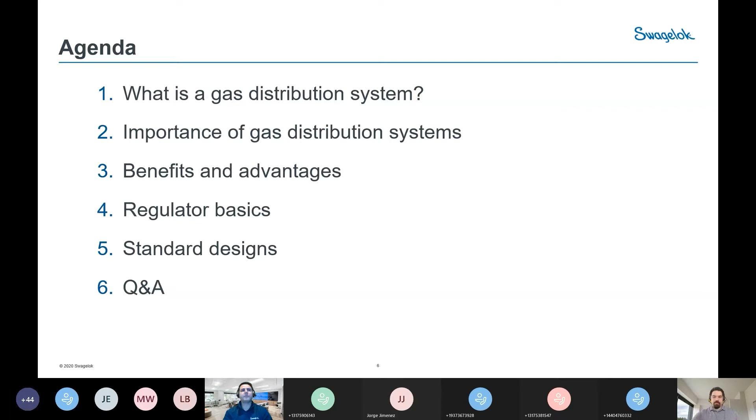All right, so let's start by looking at what gas distribution systems are. Gas distribution systems play crucial roles or functions for many industries. These systems work to deliver gases from a high pressure source to the facility at a pressure rate required by each of these applications. So the systems are designed to provide precise and safe delivery of high pressure, toxic, corrosive, or flammable gases in some cases.

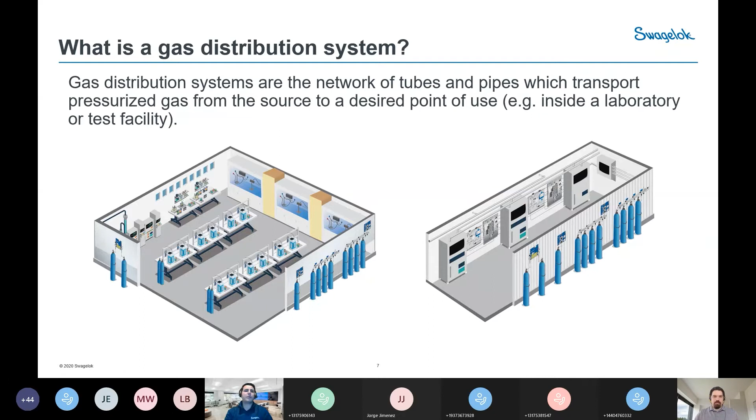There are a lot of places and industries where gas distribution systems are used. These gas distribution systems play crucial functions for many industries, research operations, and production facilities. As an example, nitrogen, helium, and hydrogen and/or air are carrier gases commonly used within gas chromatographs, for example. And the purity of these carrier gases is crucial.

So the gas sensors within these refineries, and specifically the analyzer, can occasionally drift from its specification. And the calibration gases play a crucial role in restoring that accuracy of the detectors through frequent and proper calibration. So it's crucial to maintain the purity of these gases when delivering them to certain equipment.

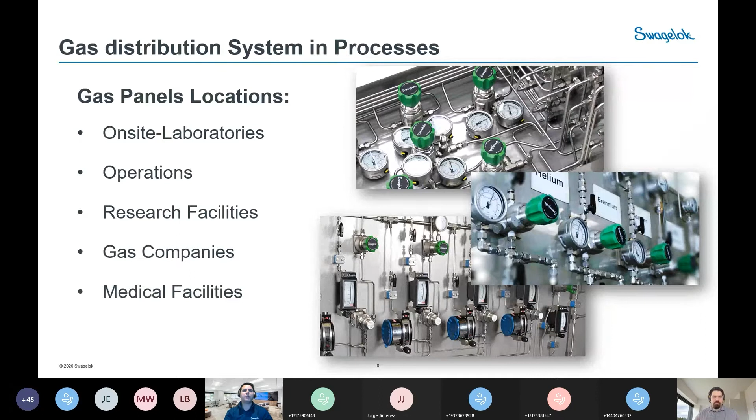Gas distribution systems can play different functions and be used for different purposes. Customers may have a need to use gas panels based on applications, functions, and needs. To list a few of these uses: they can be used as an access point for gas supply, maintain the purity and quality of the gases, reduce the source pressure to a lower or constant pressure, and enable an uninterrupted supply of gases. They can also play a crucial role in handling reactive, toxic, or corrosive gases. And in some cases, like in semiconductor applications, they can also handle expensive high purity gases.

So when there are issues with these systems, it can result not only in the loss of gases, but also loss of efficiency, and it can affect downtime and safety. So when system operation is not intuitive, when leaks are a concern, or when gas panels are difficult to service, it's time to take a closer look and take some actions to address these challenges that you're facing with these systems.

So safely, reliably, and effectively delivering gases to where they need to go provides the foundation for well-performing operations when you use these gases or these systems.

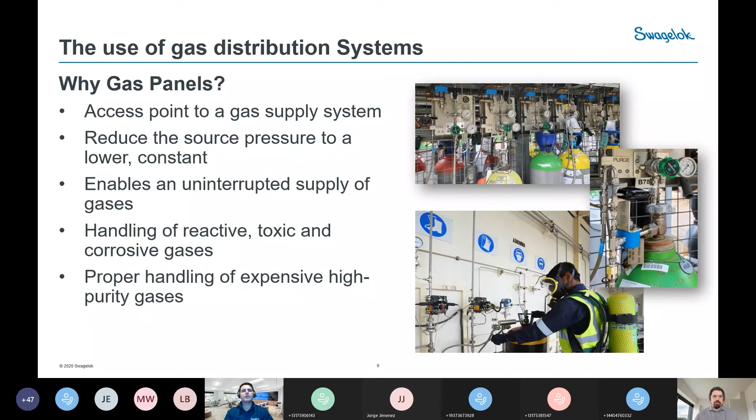There are some definite advantages that gas panels offer for customers within their operations, applications, or industries. First and foremost, they need to ensure safety. Designed with safety in mind, these systems need to ensure the safety and well-being of the operation as well as the team members. Additionally, these systems need to be designed and labeled to be both easy to understand and safe to operate.

They also improve uptime and reliability, as these systems are always intended to help maximize gas usage within their applications. They support increased uptime and improve process accuracy and repeatability.

Also, the third aspect is they save you time and resources. When they are fully assembled and tested prior to being installed, they ensure the reliability of the performance of those systems and let you focus your time and resources where you need them most. The reliability of these systems can also lead to a reduced need for maintenance, saving you additional time and resources that you'd otherwise spend on maintaining and servicing them.

Reduce the cost, and that's the last element, by avoiding leakage and unplanned maintenance. So they should be easy to maintain and troubleshoot for the operator.

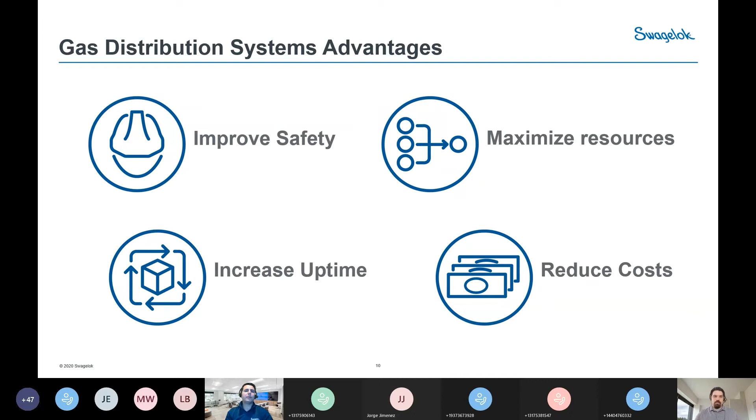Let's look at some areas where we feel there's a need to pay attention to with these systems, and how they fit into those four segments I just shared. Something usually taught in school, we call it the fire triangle, also known as the combustion triangle. It's a simple model for understanding the chemical reaction which must occur to create a fire within a gas distribution system. For example, let's consider oxygen.

The primary hazards for oxygen are the high-pressure cylinders, typically in the range of 2200 psi to 3600 psi. Gas pressure systems are built with materials such as brass, copper, and in some cases stainless steel, and also soft seal materials like Teflon, etc.

All of these are a form of fuel in an oxygen environment. By its very composition, an oxygen gas handling system already has two of the required three legs of the fire triangle, namely oxygen and fuel. So the safety of the operator and your plant or facility will depend on your ability to control the heat or ignition source for these systems.

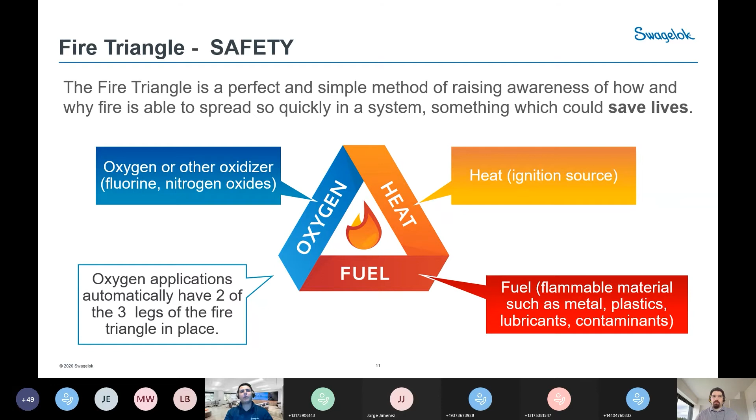Changeover systems are another area where there's a misunderstanding of what a changeover actually is. There are two types. The first is what we call a manual changeover, which provides a continuous supply of gases from two or more source containers. These are typically systems that need to be operated manually to enable the switching mechanism.

The intent of these systems is to continuously supply your operation with gas, so it really doesn't serve its function when you have to manually go and change it. It can also lead to premature change-out because you have no indication of when the change needs to happen, so you rely on best guess. This requires more involvement and monitoring from the operator.

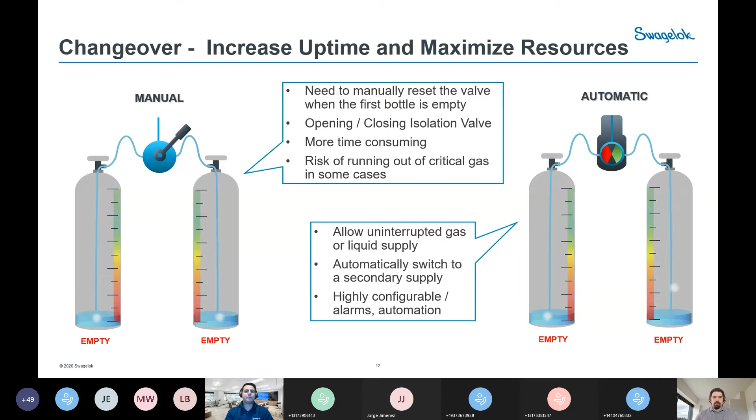So the third element that I wanted to highlight is filtration. As we all know, there is an increase in use of all types of gases, mainly driven by process requirements for manufacturing. In order to achieve and maintain system integrity and performance, the selection of an appropriate filter is absolutely essential and crucial for maintaining operation of these systems.

The main source of particles are industrial gas components used within these systems, such as check valves, fittings or threaded fittings, ball valves, tanks, and pumps. In some cases, the environment where they are installed can also cause or lead into particles. Though crucial to the process, these components may release particles through the installation.

When dealing with filters, there are a variety of options, but there are some criteria we need to pay attention to when choosing a filter, such as the filter component, the element, the material, and the housing. We need to keep in mind that the selection of the filter needs to match the task at hand.

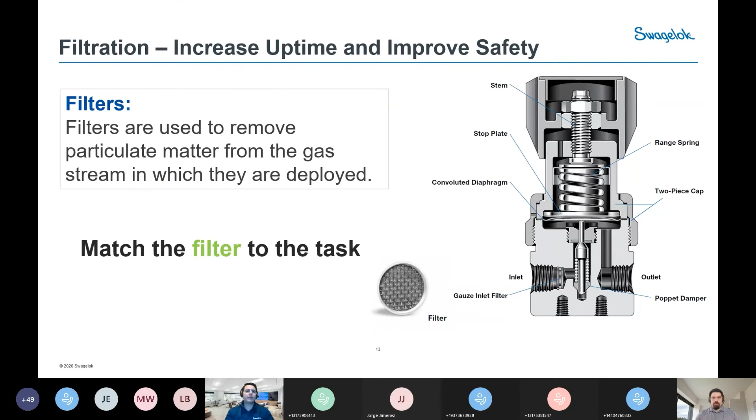A best practice is to install a filter upstream to protect the component and the system integrity. So let's take a look at some of the basic fundamentals of gas distribution systems, and specifically a key element or a product in these systems.

A pressure regulator is a type of valve that controls the pressure of a fluid or gas to a desired value. Regulators are used for gas and liquid and can be an integrated device with a pressure sensing restrictor and a sensor all in one body, or consist of multiple components separately to achieve the pressure reducing element.

Something to keep in mind when dealing with regulators is that there are two types. When dealing with downstream pressure changes, those are controlled by what we call pressure reducing regulators. But upstream pressures are controlled by back pressure regulators.

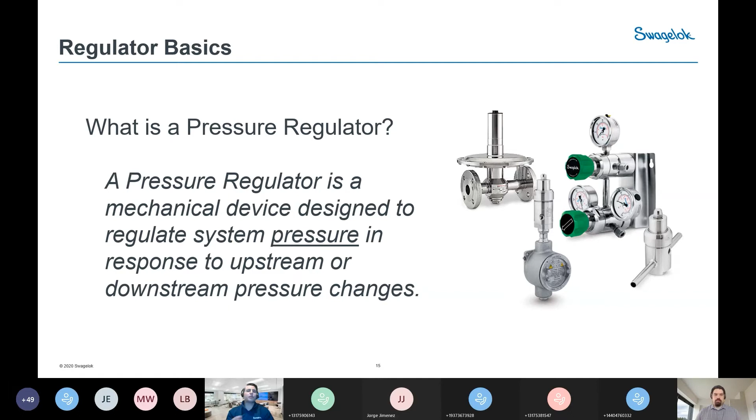When dealing with gas panels, we need to correctly select and size the pressure regulators because it's a crucial component of a properly functioning gas distribution system. The aspects of performance that are most important when choosing pressure regulators for these systems are droop, lockup, seat load, choke flow, and supply pressure effect.

A lockup is the difference in pressure between flowing and non-flowing conditions. When flow stops at an outlet pressure, as the outlet pressure builds, the balance force favors the control element, which allows the poppet to seat itself and close off the inlet pressure.

The second one, which we call droop or flow effect, is the reduction of outlet pressure experienced by a pressure reducing regulator at a flow rate. As the flow rate increases, that's the ideal area where you want to maintain regulator performance.

And the last one, which is the choke, is when a regulator is fully open in the open position and it's no longer doing its function. It's acting like a normal valve, just fully open and not controlling the pressure.

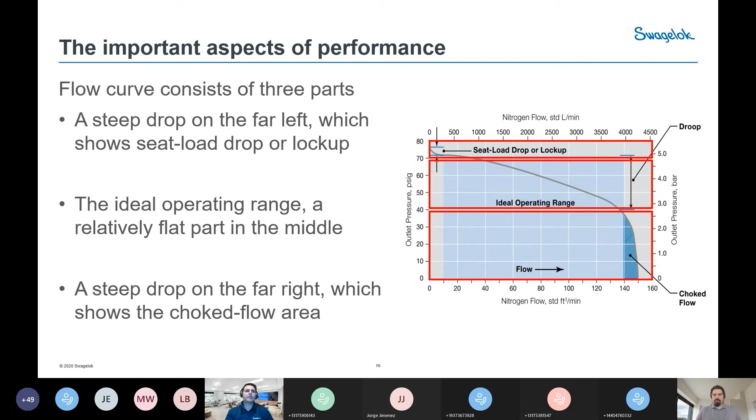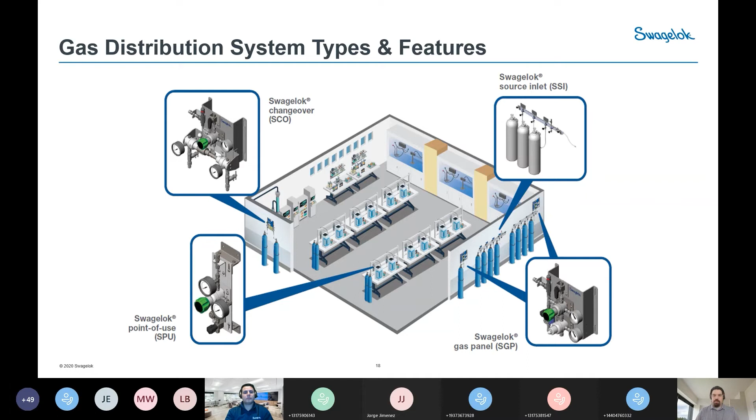For defining our gas distribution systems, we decided to break it down into four separate subsystems, and we'll go into detail on each of those and how they interplay with one another. We begin, as most gas systems do, at the bottle that's supplying all the pressure. So we have a system specifically targeted towards this, which we call the source inlet.

The real goal of this is just to connect your bottle to the rest of the gas system. As we were designing, we discovered there was a great need for a lot of flexibility here. So this one will have various options for connecting multiple bottles or single bottles, manifolding them together if desired. It will come with various options for isolation, excess pressure relief, venting, and critically, as Karim was mentioning before, filtration.

As we all know, any sort of regulators or pressure dropping devices are going to be sensitive to having debris crossing them. So filtration is included in the source inlets right up front to make sure the rest of the system stays as clean as possible.

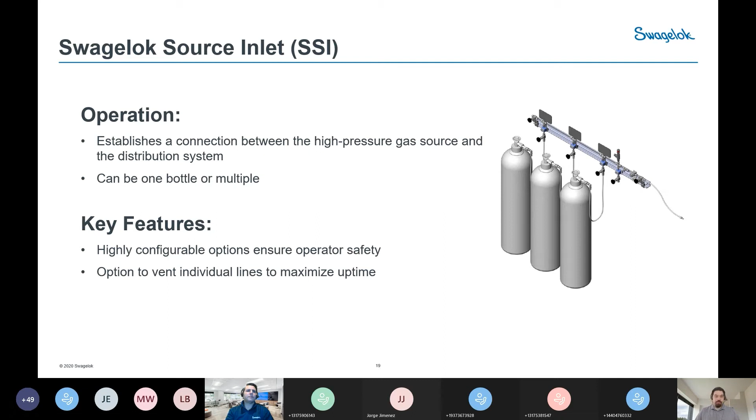So I think that's just about it for the SSI. The SSI will commonly feed one of two separate panels. The first is the standard Swagelok Gas Panel, or SGP. This is really your primary pressure regulation stage. These are available in either one or two stages of regulation. The two stages of regulation can be very desirable for helping with excessive Joule-Thomson cooling and helping mitigate the supply pressure effect to maintain a steady line pressure on the outlet.

These are all going to be wall mountable, and they'll have various options. Obviously, pressure monitoring with gauges is going to be critical on all of them, but they also have various options for overpressure relief, venting, and outlet isolation, which is lockable. Very nice feature for performing maintenance, adhering to lockout tagout procedures and the like.

These are also available with different types of regulators. So if you want two-stage regulation for maintainability, sometimes it's nice to have two separate regulators for commonality of parts, as shown here. But these are also available with our KCY regulator, where you have two regulators in a single body.

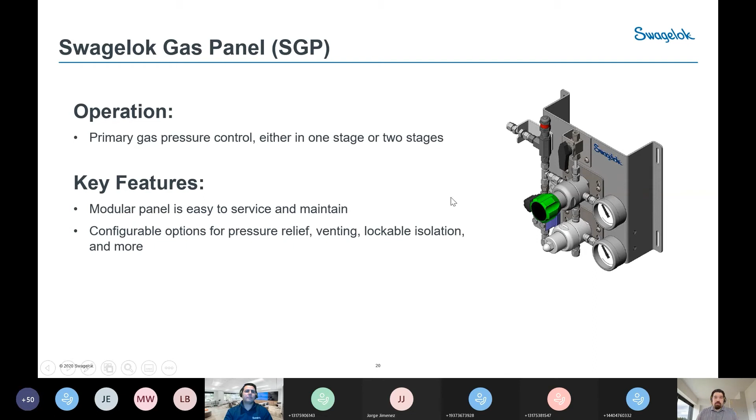The main goal of the SGP, I should point out, although it is available with some of the lower pressure ranges, very commonly feedback we've gotten from customers is that this is useful for dropping your bottle pressure to a supply line pressure, say something like 30 or 40 bar, to be distributed to other points in your plant, like a point of use.

Moving on to the changeover, or the SCO, as this fulfills the changeover function that Karim was describing earlier. This is accomplished by having two separate inlet sources, each feeding their own regulator. These two regulators are set up at a differential pressure such that when the primary gas cylinder you're drawing from reaches the changeover pressure, it'll automatically and seamlessly start supplying from the secondary source cylinder.

The SCO is able to have either the left or the right side cylinders selected as the primary source for some added flexibility. They are also available with the same options as the SGP: overpressure relief, pressure monitoring, and outlet isolation.

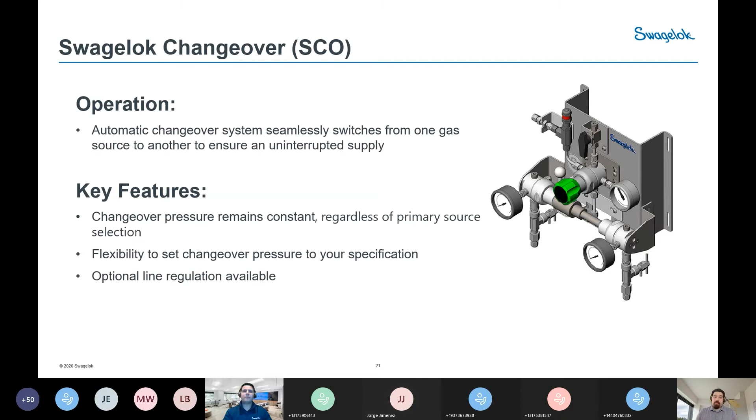Moving on to the point of use panel, this will typically be the last regulation stage before you're actually going to supply the gas to the device that requires it. As Karim pointed out, common applications include things like lab equipment, process gas analyzers, and similar equipment. This is intended to take your line supply, typically from an SGP or an SCO, and reduce the pressure to the level required for that piece of equipment.

This one is going to look and feel a little bit different than the others, but ultimately it's still a regulator panel, so it'll have some slightly different features. You'll notice it's fairly narrow. These are designed so that if you need to have several different gases available, say in a tight lab situation, they can be stacked very close to one another to minimize the footprint.

They're also extremely flexible in the mounting options available. You can mount them to walls, to 80-20 extrusion you've got up on the walls, above and below benches. Really intended to be flexible that way. Critically, these are also available with filtration, a kind of last step filtration to make sure you're protecting anything downstream. Typically there will be some sensitive or occasionally very expensive equipment that these are feeding, and it's important to make sure the gas is clean as it's being supplied to them.

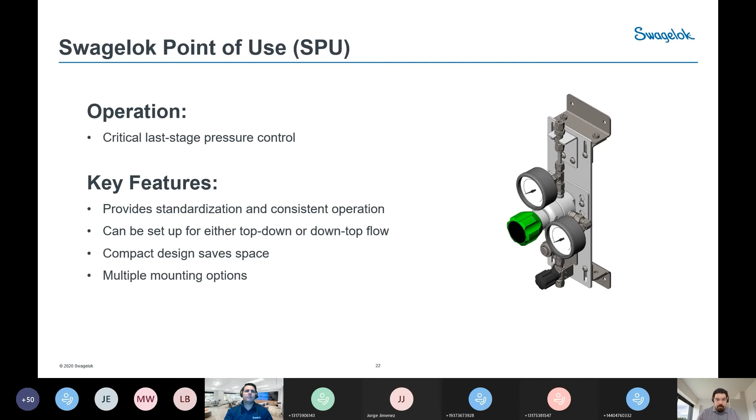One of the things we wanted to make sure we were supplying for these, as we begin to standardize these gas distribution systems, is that they're available with user manuals. It's very easy to generate sales and as-built drawings for them, and you'll see the drawing example here even comes with a complete bill of materials. The way these are configured also makes it very easy to provide a spare parts list, so you can have all your documentation ready at hand.

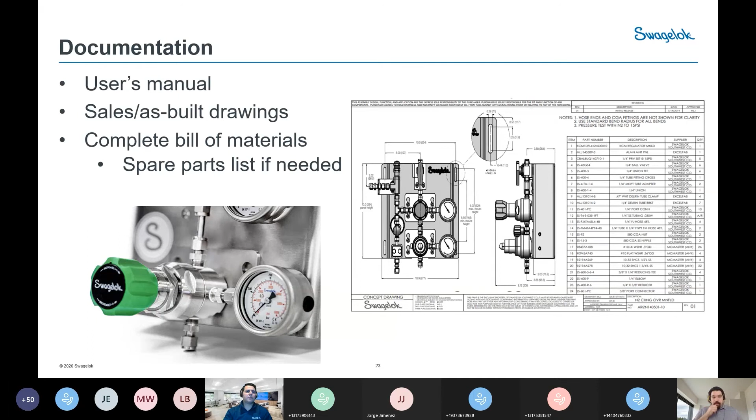Here's a couple of clips from our application guide to assist with the part numbering. You'll notice all the various options easily break down, just like any of our regulator catalogs for those who are familiar with those. We also have our sales and service centers equipped with some factory developed tools to assist with creation of these designs.

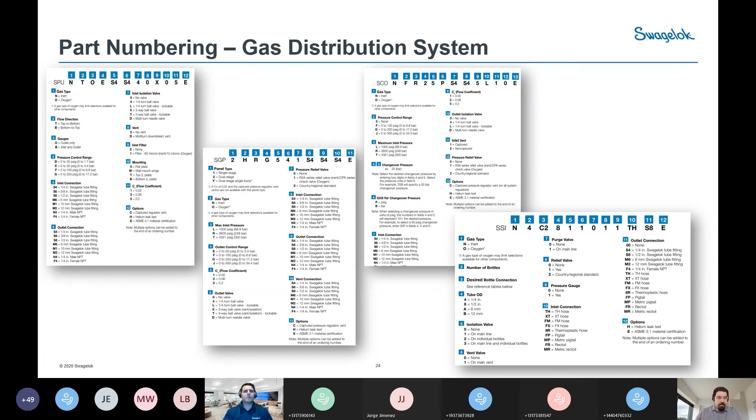Awesome, on to the next. Thank you, Joe, for the insightful update about the systems. I just wanted to share some details on how we went about developing the solutions, but also the training that most of our sales and service centers go through before they are able to design the systems. It's more about us doing the training needed to support the development of these solutions and customize them locally. So we currently have what we call a certification program.

As Joe and the team mentioned, we develop these solutions. We don't want to just push them and sell them. There is training that needs to take place before any sales and service center is able to assemble but also configure these systems. With the certification program, our sales and service centers go through extensive training on the design aspect, the theoretical aspect of these systems, and how to design them, but also make changes that the customer might have.

After they go through that certification and extensive training, they are granted the certification to start building these systems and working with you by utilizing some of the tools that Joe mentioned, which we developed to help speed the process in providing you with solutions, but also making the changes needed to give you the best solutions for your applications.

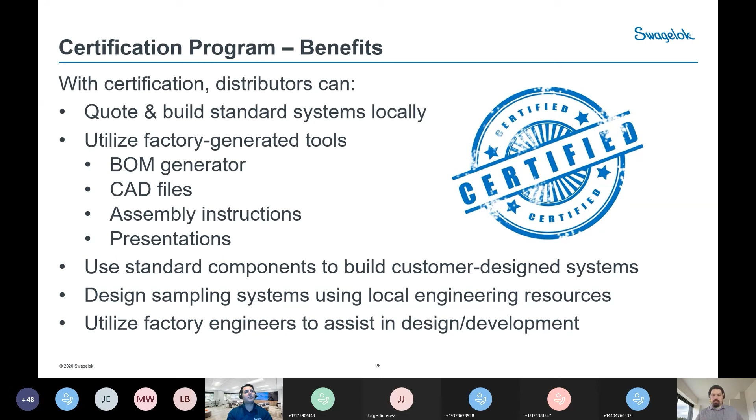We use standard components to build and design the systems, and we also use local engineering resources that you can work directly with through our sales and service centers. Lastly, if needed, for applications that are very unique and very challenging, we can certainly tap into our engineers here at the factory, who can assist with making the right assessment for that application and recommending solutions.

After the certification, we build that expertise and bring it all together. There is local support that you will have constantly from our sales and service center. They all went through that training, so they've built their expertise to be able to design the system, but also understand and assess your applications.

All of these systems have been integrated with best practices from our standard designs. Because we have about 70 years of experience in analytical consultation, along with all these applications, we've developed what we think is best practice and the best designs available out there. These systems have been designed with safety in mind, but also effective at delivering the gases or media needed. We've integrated them with best practices, like we shared through the filter, through assessing the gases or media being used with them.

They can be adapted to meet any requirement. So what you see there is not exactly what you want — we can certainly make changes and adjustments to the system to make it fit exactly what you need. So don't think that everything you see there is exactly what we can offer. That's just a fraction of what the team can do and support.

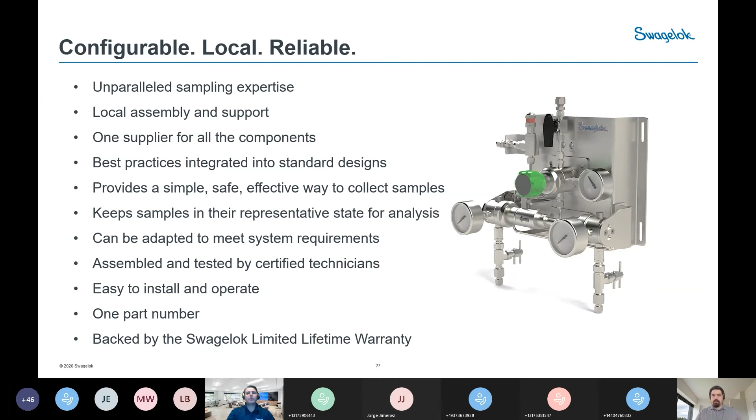So that concludes our training, and we'll be happy to take any questions that you might have.

Yeah, we have a question that came to the chat.

I saw options listed for oxygen and for inert gases. What about flammable or toxic gases, i.e. sulfur, chlorine mixes? For most of the flammable gases you'll commonly see, you should be able to use one of the inert system designs already available. Typically, you'll need to look at material compatibility with any of the soft goods or stainless steels in there. If you've got something toxic, like a chlorine mix that's potentially corrosive, that'll have to be addressed. The standard designs available should suit the majority of applications. But if you have a particular need, a toxic gas that isn't able to work with one of those, the gas distribution program serves mostly as a design platform, so your local sales and service center should be able to assist you with a custom design suited to your individual application.